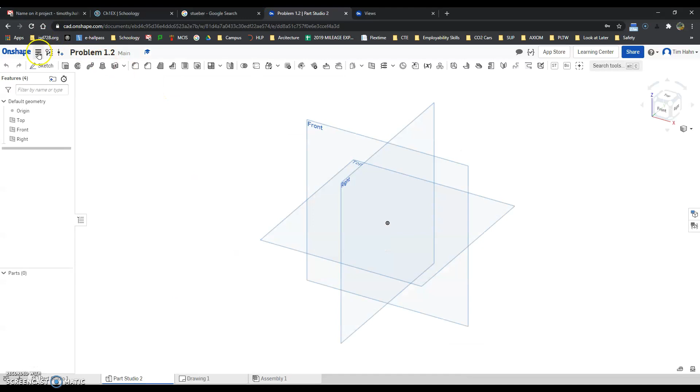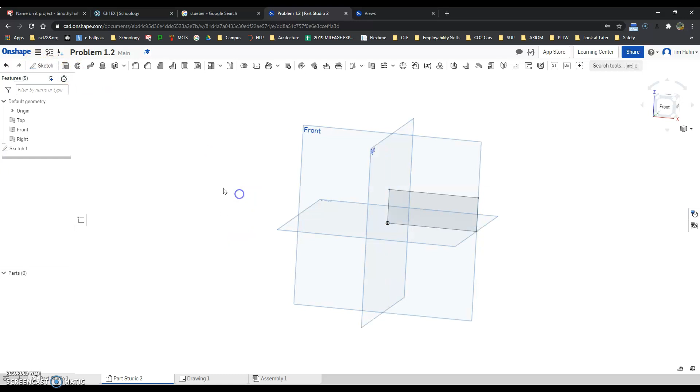So sketch, front view, right click, normal to plane. Three, 1.125, there is my beginning. Hit the check, right click, isometric, extrude. I don't remember how thick it is, so I'm going back to drawing: 3, 1.125, thickness of 1. Thickness of 1, check. There's my base view.

So now I've got to start cutting stuff away here. I'm going to start out cutting right here, this angle off. So I need to find out where this point is and this point is. It's 1 inch from the edge here, and from the bottom edge up, I can't tell, there's no dimension right here, but if I follow this across, that means it's the same here. So it's 1/4 inch from the bottom, 1 inch from the left side.

So I'm going to go to my part studio, draw a sketch on this front plane, I don't even have to go normal to. Click that angle, and I'm going to dimension from this edge to this point, and that's going to be 1. Dimension from this edge to this point, and that's going to be 0.25. So all I got to do is have that line, 1 inch, 0.25, everything turns black because it's fully constrained.

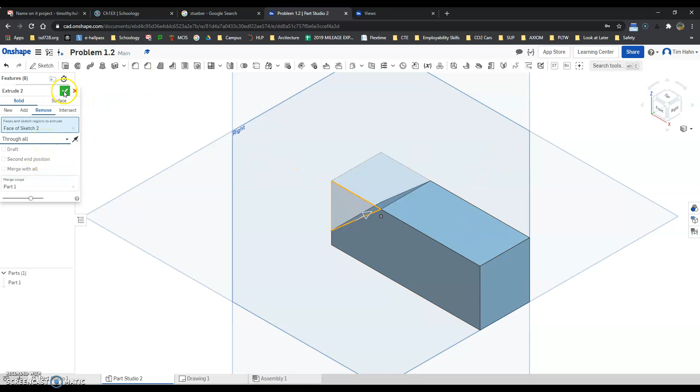And I'm going to go check, extrude, pick that little piece out, it's coming off, so I got to hit remove, through all. So if you always want to cut it off, make sure to go through all. Even though blind would have cut it off, if I changed the thickness, it wouldn't automatically update.

So there, I got that angle done. My next piece is I'm going to cut this chunk off here. Now this is basically, if I take a look at it, there's a square in here, there's a rectangle right here, and then there's a rectangle up here.

So I'm going to start out with this square right here. Actually, I don't like that square kind of hanging out there in the middle of nowhere, so I'm going to go with this whole rectangle right here, come to the bottom of this right here, and there's a rectangle in there that I can see. So what I'm going to do is draw a rectangle, front face, rectangle, click on this edge here, and come over to here.

Everything is movable at this point. How far is this bottom up? It's 0.25 from the bottom. Part studio, bottom up, 0.25.

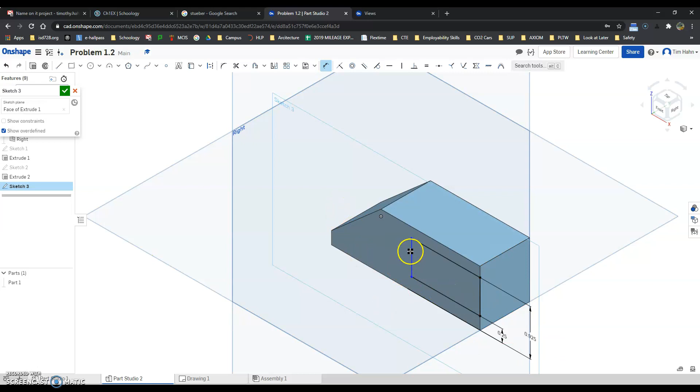Coming back over here. So now from the bottom up to the bottom of this little piece right here, that is, follow, 0.925. So I'm going to come back over to here, and set that. I'm on the dimension tool again. Here to here, 0.925, enter. Only thing left blue is this over here, so I got to get the depth.

So I'm going to go to the drawing, and the depth, it comes from the 0, it's 1.5 from this 0 edge. So I'm going to bring it over, dimension, click this edge, click here. Again, 1.5.

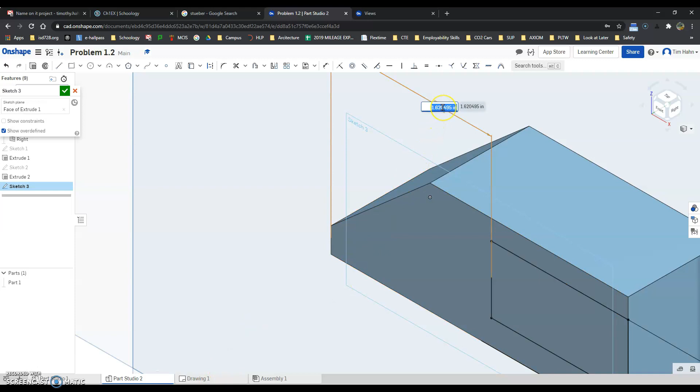And it made that rectangle. Green check. Extrude, remove, blind, got to be through all, green check. Now I got that C shape there. I'm happy with my C shape so far.

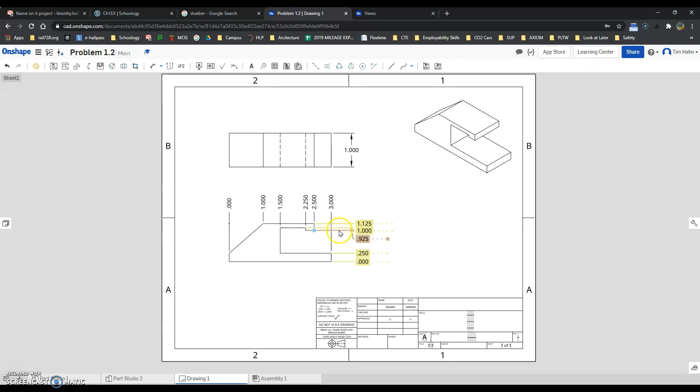Now I got to get this little piece of the rectangle done, this little chunk right here. So that starts at this upper corner, goes up and to the right, 2.25, and 1 inch from the bottom. So I'm going to come over here.

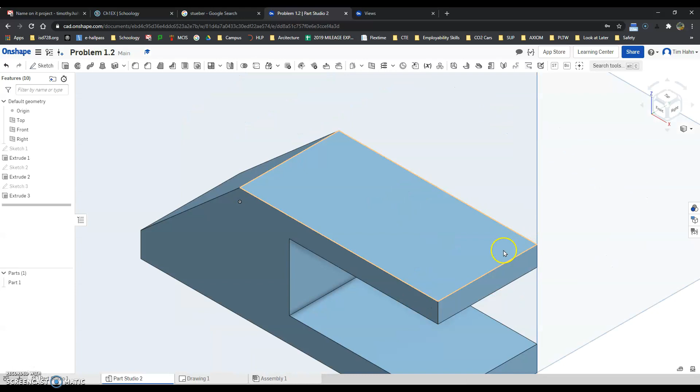I'm going to start rotating this a little bit just to see it better. Sketch on that front face. Dimension, there to there. Oh, that one's already set.

I did grab the wrong dimension. There to there, 2.25. And from the bottom, from that 0 up to here, is 1.

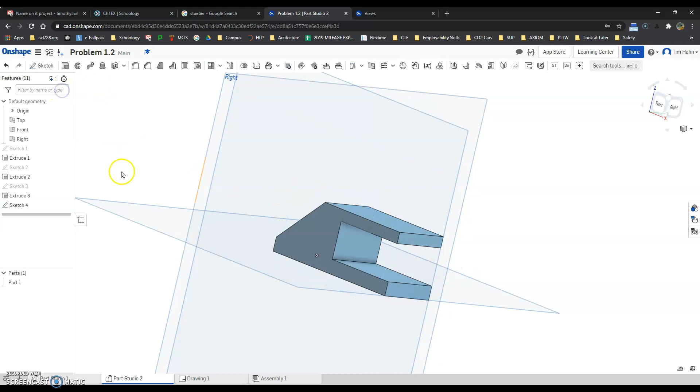Green check, extrude, pick that little chunk that's adding, so we got to remove it. Through all, boom, take that chunk off.

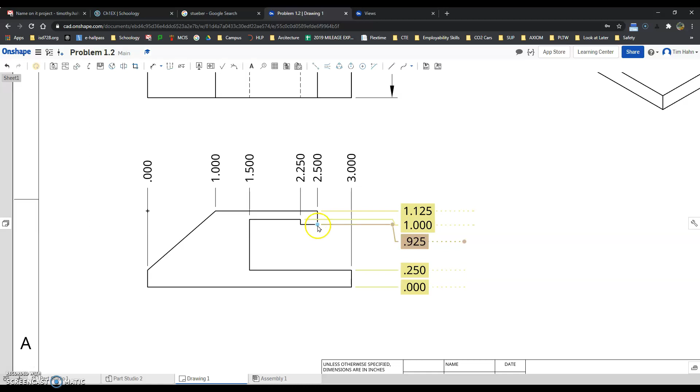Last thing I got to do, I got to shorten this piece out. Right now this is going all the way out to this corner, so I got to shorten it. That's 0.25 from this edge. The thickness is the same, so we're going to lock it edge to edge.

Sketch on this surface, draw a rectangle, corner, corner. Oh, wrong dimension spot. I gotta go from the 0, that's my 0 over there, to here.

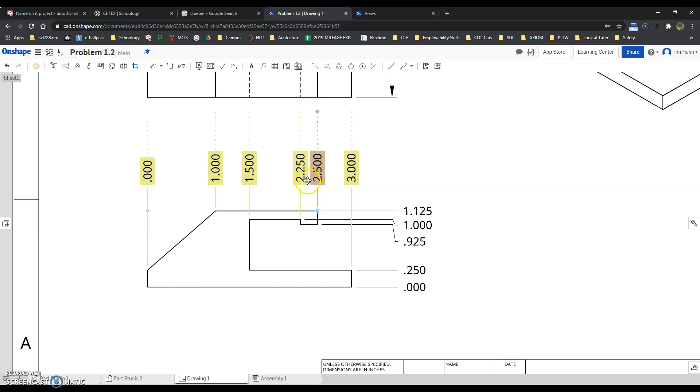And I gotta check out what that was. 2.25 from my 0 over to here is, or sorry, 2.50. 2.5. Check.

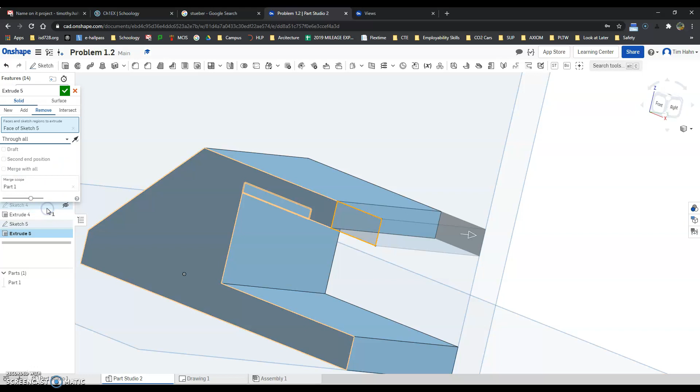Extrude, grab this chunk, remove, of course through all, green check. Right click isometric off to the side, tap the P, get rid of the planes, isometric, make it bigger.

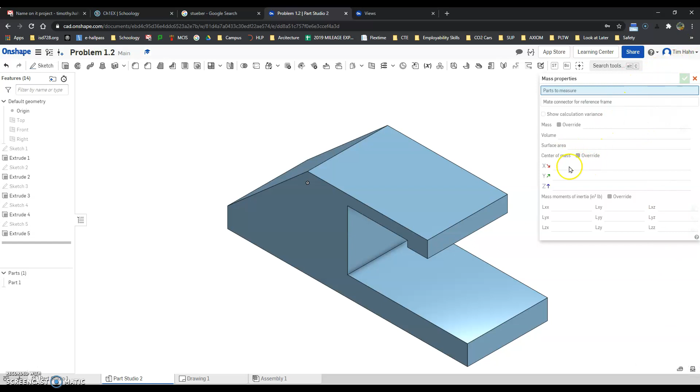Bring up my measurement again, my measurement here, click on the part. Volume 1.769, got my name, got my 5 extrudes, should have my 5 extrudes. You can screenshot this and put it in.